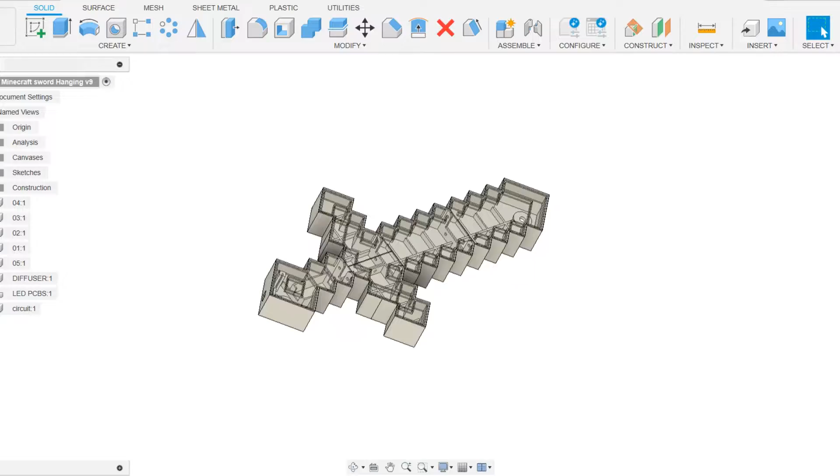LED PCB. Due to the length of this sword, we had to split the models into 5 parts, which we then put together using nuts and bolts to form the entire sword. We load the image of the Minecraft sword into Fusion 360 and set its dimension to 550mm by 280mm. Next, we model the sword by tracing its outline and then we extruded the sword with a thickness of 60mm.

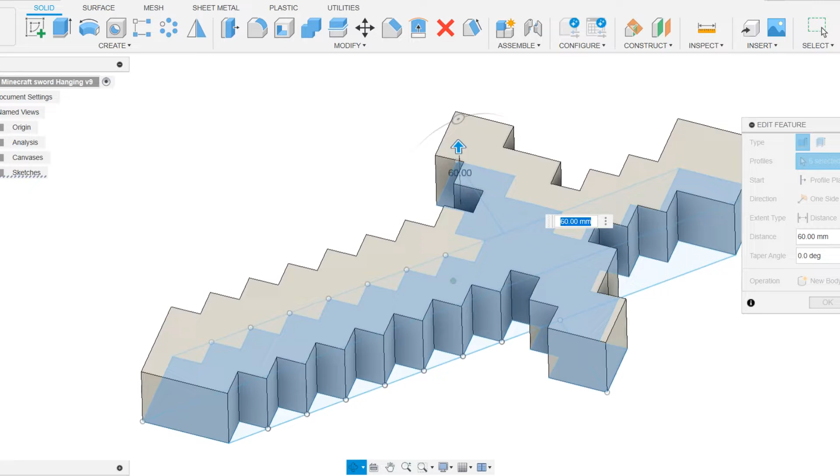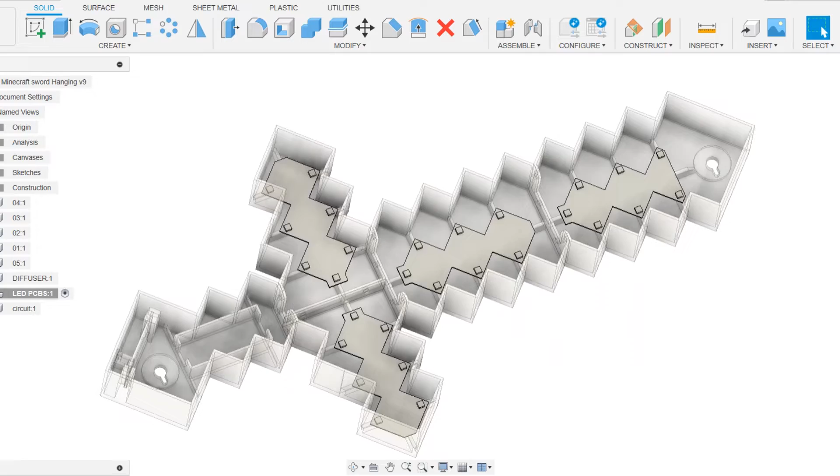Later, we further divide each section into two parts, which are the lid and the lower base part, which will house the LED board. We designed parts such that we could mount two sections together with M3 bolts and nuts in order to join several parts together. The LED board inside the crossguard and blade portion of the sword illuminates the PLA printed top plate part. The circuit is housed in the grip portion of the model.

After the model was ready, we exported each of the 5 lower and 5 lid components into STL files, and then we used marble PLA for the lower parts and transparent PLA for the lid.

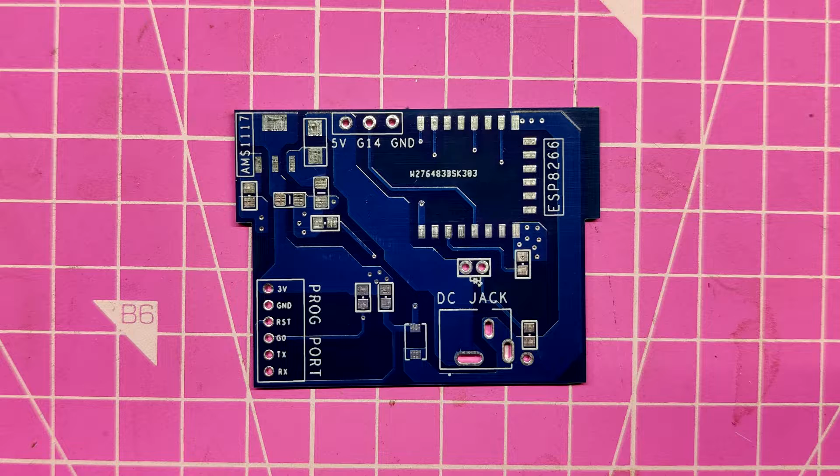The main circuit board and the LED board were the two PCBs that we had to model in total for the PCB design. The LED board schematic shows 7 WS2812B LEDs linked in parallel, which are intended for lighting the sword's top lid. Two sides have been added to the schematic, the input side and the output side. The VCC and ground of both sides are connected in parallel. The only pins that are different are the D in and D out pins, which are each connected to a different Con2 pad. The second board was the ESP12F board.

As the name suggests, the ESP12F module is used in boards like the NodeMCU or the ESP8266 products. In the schematic, we have added an additional AMS1117 3.3V version, which steps down the voltage coming from the input side to a stable 3.3V for the ESP12F to function.

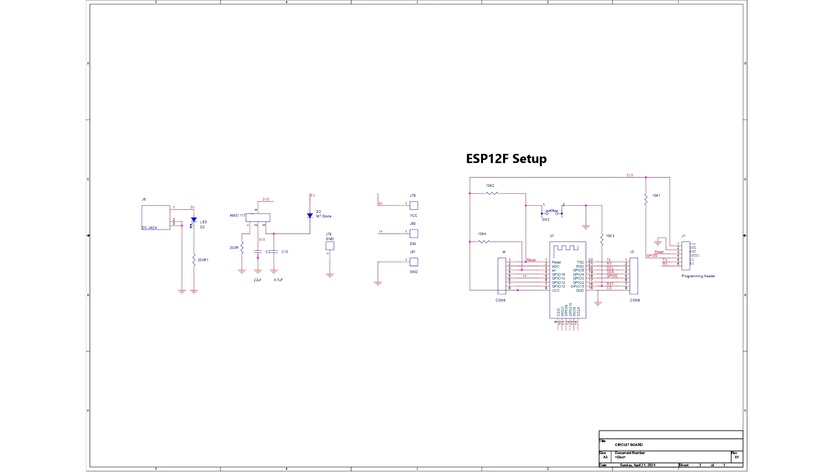After completing the PCB design, we exported the Gerber data and sent it to PCBWay for samples. Two orders were placed, one for the main circuit and one for the LED board. We placed an order for a white silkscreen LED board and a blue silkscreen circuit board.

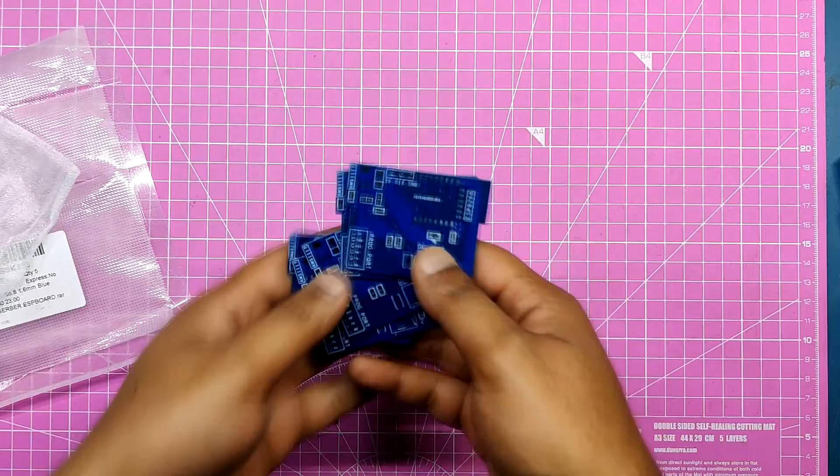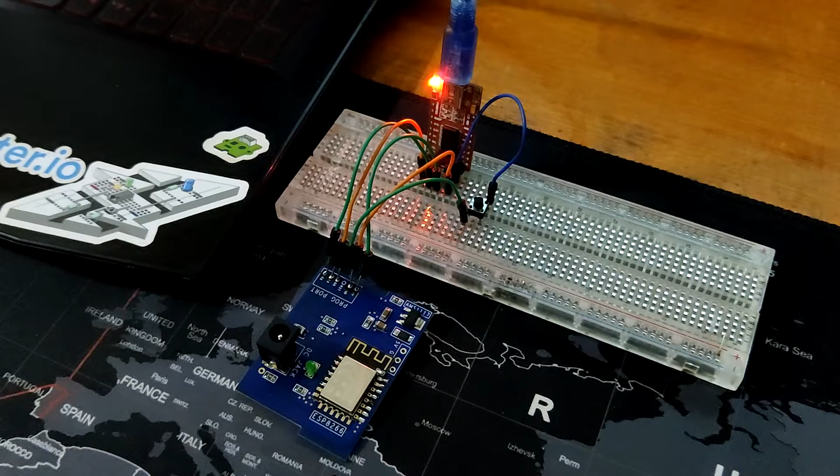Here's the code used in this build. The usual FTDI board method, which requires connecting a flash button between GPIO 0 and ground, is being used to program the ESP12F module. During uploading, the ESP12F enters programming mode by long pressing the flash button first, followed by the reset button.

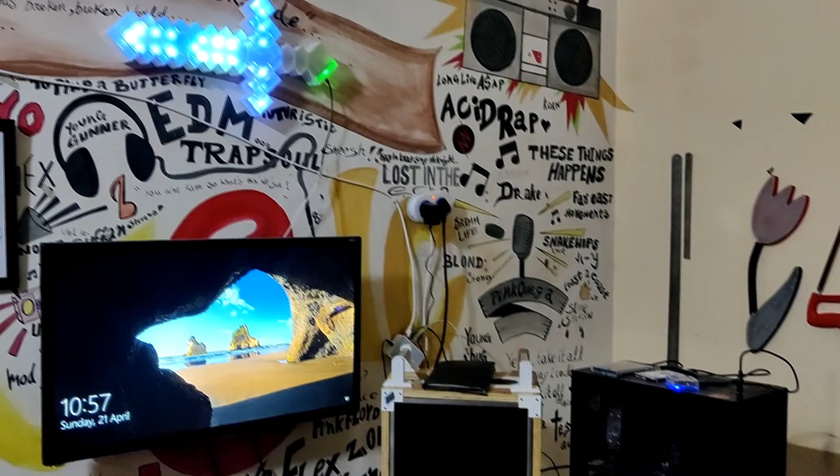This is the end result of my little build. A functioning, illuminated, life-size Minecraft sword that I built from scratch using 3D printed parts and custom PCBs. We are using a barrel DC jack to USB cable that is connected to a 5V 2A power source to power the system.

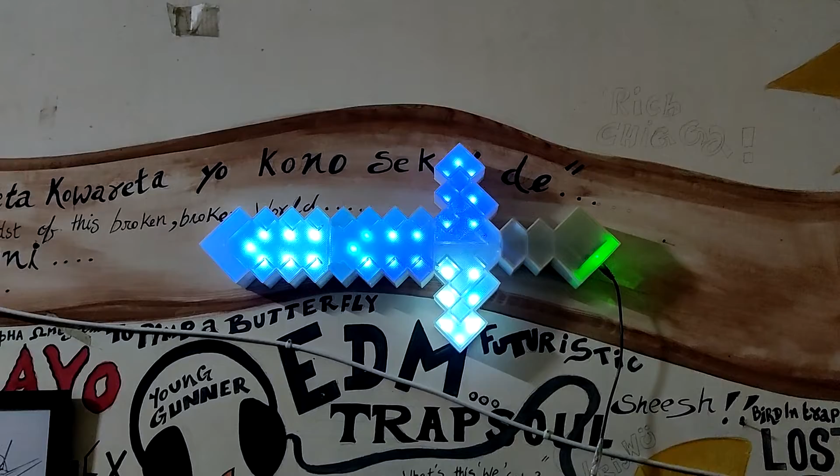By using two nails, we were able to mount this setup on a wall, thanks to the keyholes made during the model design process. The best thing about this project was how the parts were 3D printed on a small 3D printer and divided into smaller printable bits, so anyone with a small printer could easily build it. Overall, this project is completed and needs no further revisions.